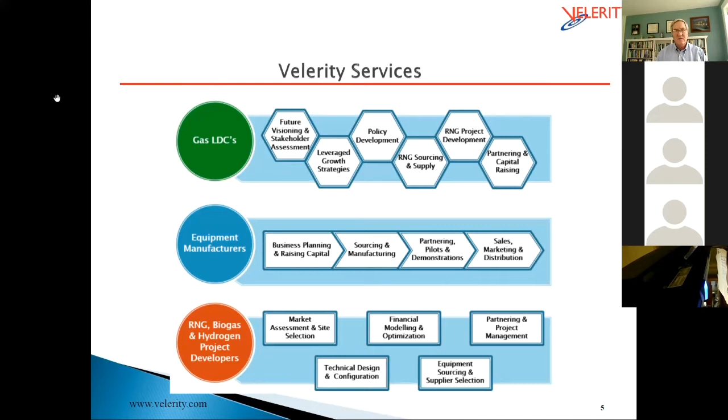Velerity is a consulting company. We're involved in advising energy companies. We've been doing some work recently in the gas industry in terms of decarbonizing strategies and the integration of biomethane, anthropogenic sources of CO2 and methane, and integrating those sources into the renewable gas supply chain.

The clients Velerity has had include energy companies around the world, both gas and electric, as well as technology companies developing new technologies. I've been involved in the hydrogen industry for 20 years. It began with customers coming to me and inquiring as to the hydrogen market and the opportunities therein. And that has continued right along and really amped up more recently.

So what is driving the global trade in hydrogen? Again, it's a geopolitical market. There are places where the energy advantages are strong in terms of resources, and there are places which need energy and are looking for supply chains which can meet those needs in a decarbonized society. And that's really what we're talking about today, which is, where are the markets for hydrogen? How are those markets driving global trade? And what are the solutions that are being developed that make it economic?

Just a few years ago, this would seem as a tilting at windmills type strategy, pardon the pun. But again, we're now looking at a market that has a need, and the economics have turned into the favorable box in terms of meeting that market's need. So we see a doubling of global demand for hydrogen by about 2035, 2036. And as we get closer to 2050, we almost see a quadrupling of demand for hydrogen.

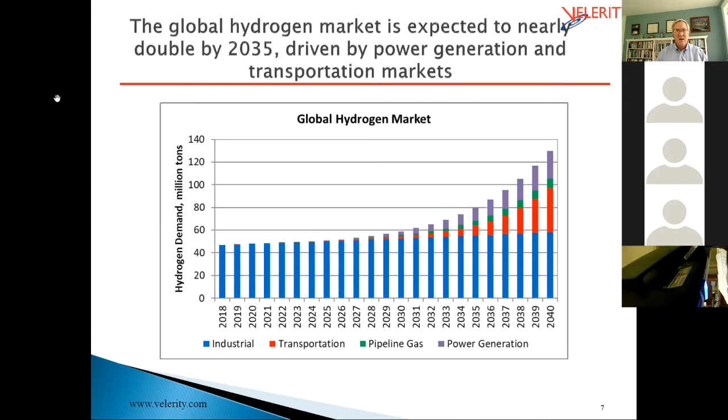The base on this chart is the existing demand for hydrogen in industrial markets. That's dominated by petrochemical processes, ammonia production, and methanol production. And those are going to continue, but the industrial will grow as well, with hydrogen seen as a solution for those so-called hard to abate markets, those technologies and applications where it's very difficult to wring the carbon out of the process, either as a chemical feedstock or as a high temperature requirement, hard to electrify.

So if you're going to locate a solar plant somewhere in the world, those are great locations where the sun is very strong and makes favorable economics. If you reach a price of 2 cents per kilowatt hour for solar, and you can power an electrolyzer, the marginal cost of producing hydrogen results in a dollar per kilogram hydrogen.

And that's very competitive. I mean, the cost just for a very large steam methane reformer, the cost of hydrogen out of that reformer in Corpus Christi in Texas, for example, would be somewhere between $1 and $1.50 a kilogram. So solar has become very favorable with the standard gray hydrogen production process.

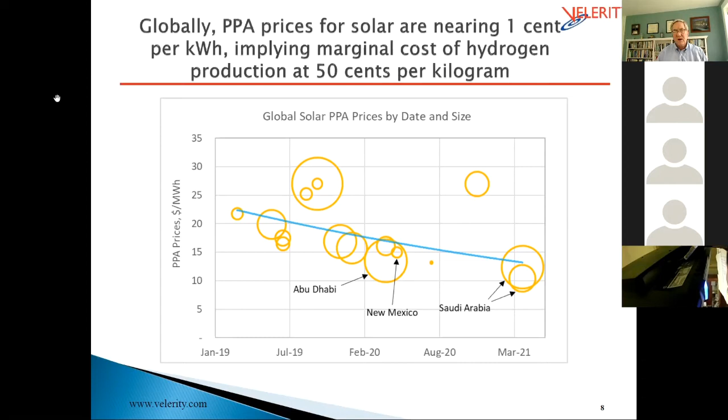They see the risk of their coal and LNG export market associated with carbon. So they began shifting very early in terms of looking at the potential investment opportunity and return opportunity to keep their resource business going. Australia is a key global supplier of coal and natural gas LNG, and they really want to keep that resource business moving forward in some respect.

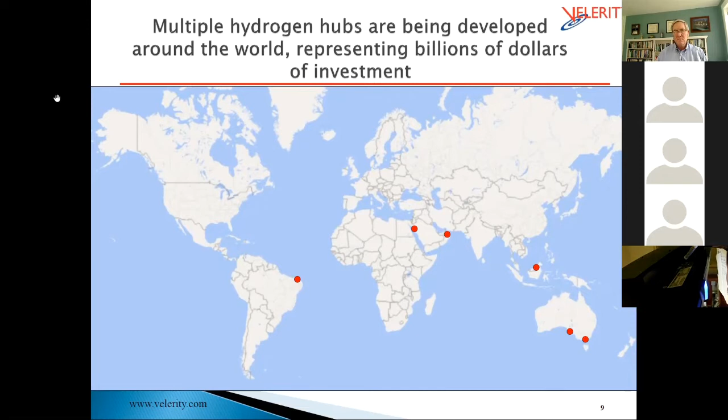The NEOM project is a $7 billion project overall, and it's important to recognize that there's 2 major pieces to that project. NEOM is, I think the expectation is to spend something like $500 billion on developing a new sustainable city in northwest Saudi Arabia, and the infrastructure initiative around energy is one part of that project. And we're talking about the ammonia export opportunity that they are developing associated with the NEOM project.

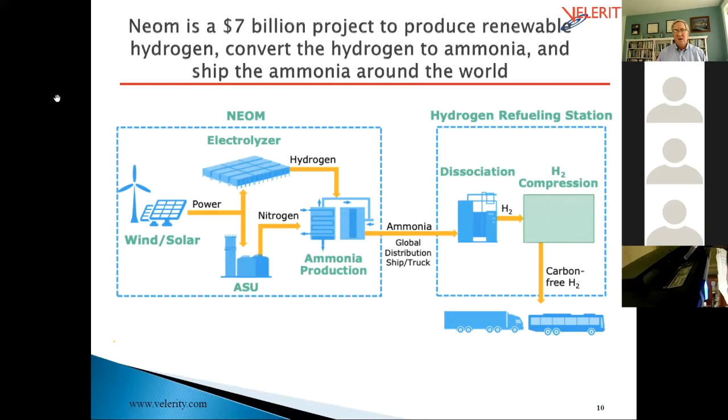The NEOM project itself is about a $5 billion investment that includes wind and solar, electrolyzers, and nitrogen production in order to produce ammonia. And then ammonia is going to be distributed via ships. So we see the next phase of this project is the distribution of ammonia around the world to support the truck and bus refueling industry, with the ammonia disassociated back to hydrogen at fueling stations around the world.

The companies involved in this project include Acwa Power, Air Products, and the city of NEOM, and they are all 1/3 share partners in the core $5 billion investment project. Air Products is handling the $2 billion investment in building out the distribution infrastructure around shipping ammonia around the world and turning that back into hydrogen for refueling. They also have as partners ThyssenKrupp, which is providing electrolyzers, and Haldor Topsoe, which is providing the ammonia manufacturing technology.

The solar and wind associated with the project is about 4 gigawatts, and they're expecting to produce 650 tons a day of hydrogen, which will then produce 1.2 million tons a year of ammonia.

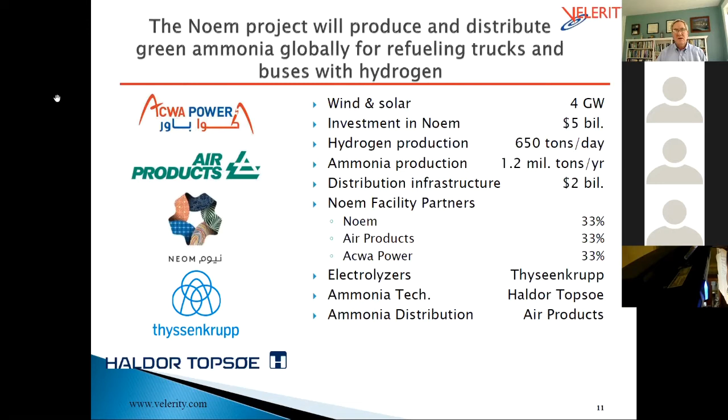One of the early leaders in developing an understanding about the global market for hydrogen, in terms of the technology of actually moving that hydrogen, has been Japan, and they've been pursuing a 3-pronged strategy with hydrogen. They are looking to source hydrogen as a major part of their energy strategy in Japan. And they're looking at sourcing that hydrogen both in terms of liquid organic hydrogen carriers, so-called LOHC technology, as well as liquid hydrogen import. And it's likely that they are also going to pursue the ammonia strategy for hydrogen.

What's interesting, and we'll touch on it a little later, is that hydrogen converted to ammonia is certainly used in fertilizer manufacturing, and we're seeing initiatives to green up fertilizer manufacturing by greening up ammonia with green hydrogen. But we're also seeing a strategy to consider ammonia for motive power for shipping, as a fuel for large ships, and also ammonia being used in turbines for power generation. So we're going to see more about the ammonia strategy in decarbonizing our economy as we go forward.

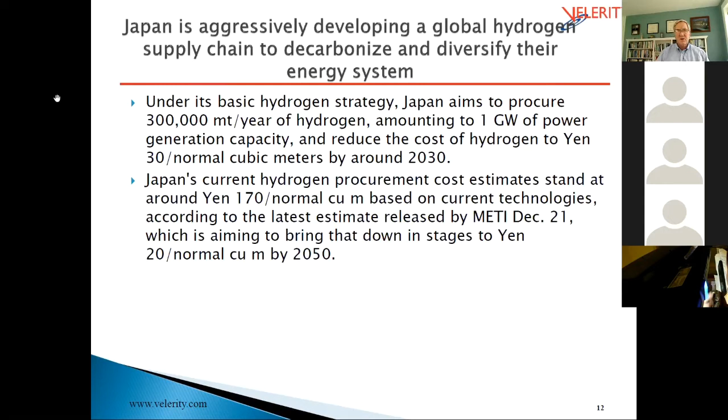So the first is this LOHC project, and the LOHC is produced in Brunei. The plant is co-located with an existing LNG facility, which is converting gaseous natural gas to liquid natural gas and exporting that. It appears that what they're doing is using steam methane reformation to produce the hydrogen. There's also a methanol plant next door, so they probably already have an existing hydrogen production facility in Brunei that they're probably just tapping in for that hydrogen. As such, unless there's some kind of offsets or sequestration, it's not necessarily green hydrogen, but certainly is a test of the technology for bulk transport of hydrogen.

A company called Chiyoda, and I apologize if I'm not pronouncing it correctly, has been working on this technology for storing and transporting hydrogen for many years. Their core competence is developing the reformation technology associated with the toluene chain. We'll talk about that.

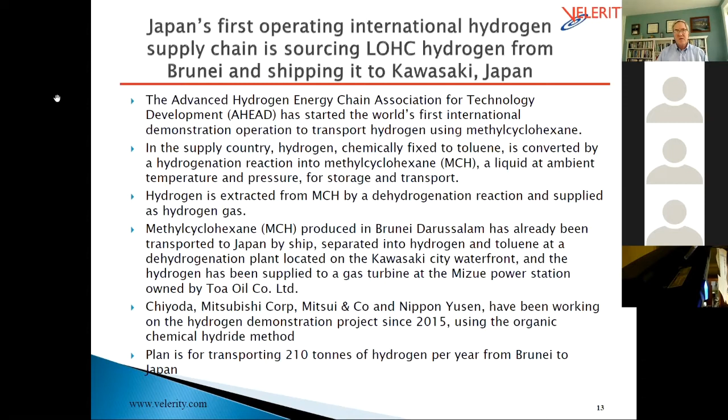If I can pronounce this long word, it's methyl cyclohexane, that's then reacted and turned into toluene, with hydrogen being the exit gas that's taken off. It's basically hydrogenation and dehydrogenation plants at either end, and it's a cycle that requires the return trip of the underlying chemical constituent.

This is a chart that shows the cycle basically, and they've built this facility, and they're actually transporting MCH, so-called, and transporting back the toluene in this cycle. Certainly, the ship has to be fully commissioned for both sides of the trip. I'm not sure how the economics work on that. Typically, hydrogen in a liquid ship, for example, might consume 10% of the value of the stock in the transport, depending obviously on the distance and so on, and the volume. So it does consume a certain amount of the value in the trip.

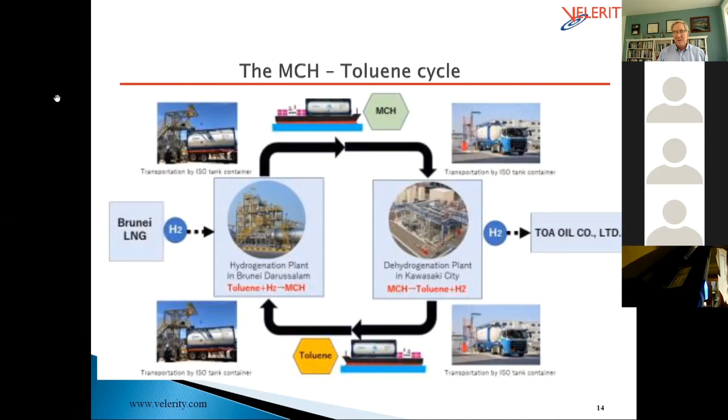The hydrogen in this case is being used to power a power plant in Kawasaki, Japan. So this is the hydrogenation plant built and operating in Brunei.

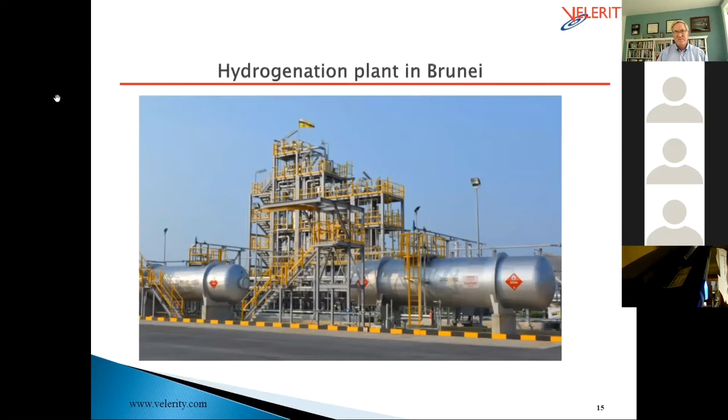This is the tank that is used for the transport, and the photograph does not really tell us how big this tank is. I can tell you it is quite big. I don't have the actual dimensions, but I've seen other photographs of it, and it's fairly sizable.

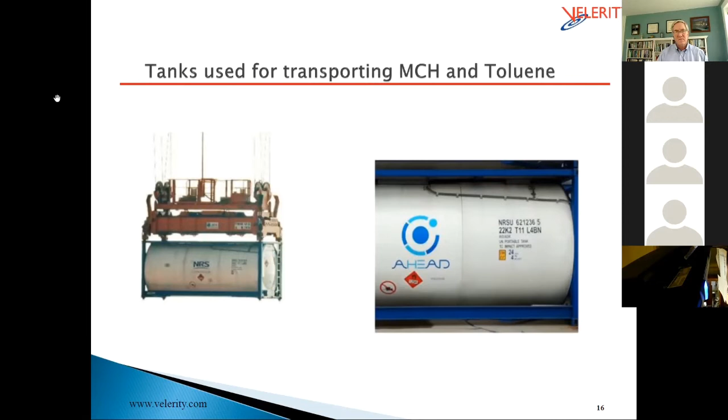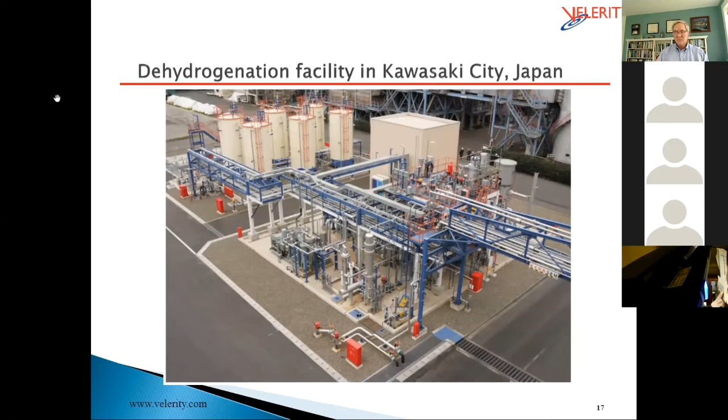Here's a case where a technology has been developed, and Japan has funded the actual use of that technology to investigate its prospects long-term for building a global market in hydrogen trade. And here's the dehydrogenation facility in Kawasaki, Japan.

The other project that Japan is pursuing is transporting hydrogen from Australia, the Latrobe Valley, to Kobe, Japan. This is not the cleanest technology per se, but Australia is a bit on their game, because they will be separating the carbon associated with the gasification process and sequestering it. Fortunately, Australia has spent oil wells that they can use to sequester carbon, and that's the strategy they're pursuing, as I understand it, in this particular case. They will be gasifying brown coal, sometimes referred to as lignite, and they'll be liquefying that hydrogen after steam methane reformation, then transporting the liquid hydrogen from Australia to Japan and unloading it in Kobe, Japan.

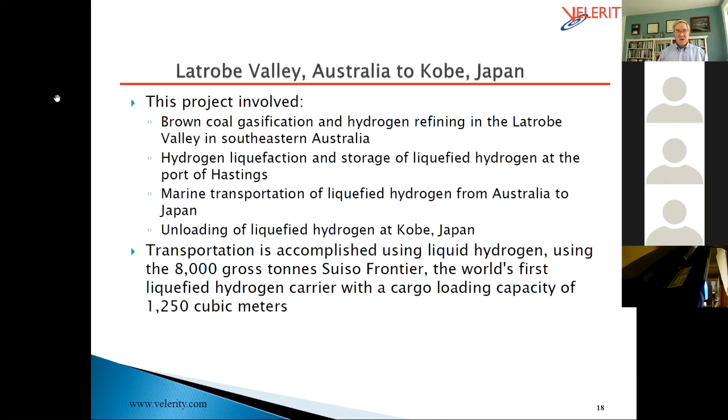The transportation: they built a ship that holds 1,250 cubic meters of hydrogen in liquid form. This is the ship, the Suiso Frontier, a 116-meter long hydrogen tanker that holds 75 tons of hydrogen. It's fairly impressive that Japan is moving forward with this level of investment.

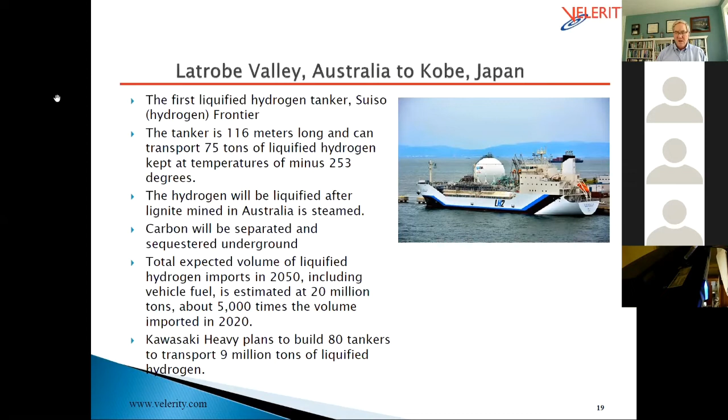What's really fascinating is if you look at the expectation going forward, Kawasaki built this tanker, and they have plans to build 80 of these tankers going forward. So they expect quite a business to develop in transporting liquid hydrogen around the world. You can see this projection of 20 million tons a year by 2050 by Japan for hydrogen imports. So we're going to see quite a growth in this business.

Another project announced not too long ago is between RWE in Germany and H2U in Australia. I'll note, I don't think it's mentioned here, H2U is developing several projects to produce hydrogen in Australia, and they have an investment by Mitsubishi. So the two projects we're speaking about, the one that RWE has an agreement on, they're looking to ship 40,000 tons a year of ammonia from Australia to Germany on this first project in the Eyre Peninsula Gateway project. They're looking at 75 megawatts of electrolyzers to begin and potentially 1.5 gigawatts down the road. That's a huge jump in capacity.

The ammonia is going to be received at an LNG terminal on the coast of northern Germany. They seem to have a strategy not entirely clear, but one is to provide ammonia to ships for motive power, and the second is to convert the ammonia to hydrogen and then feed that hydrogen into the regional natural gas system.

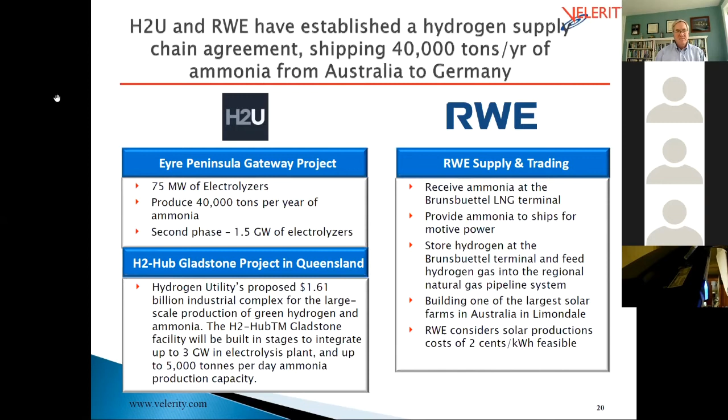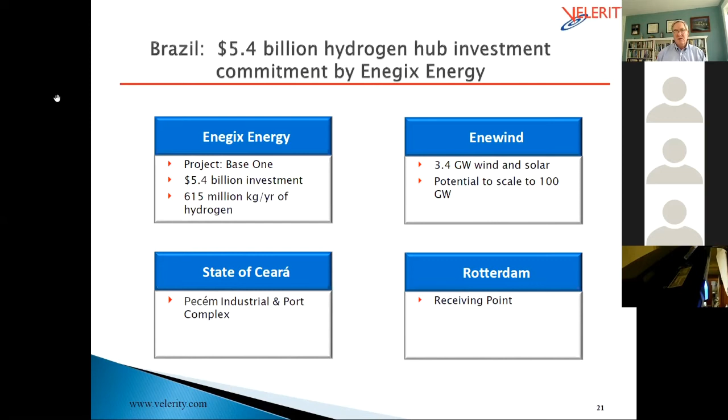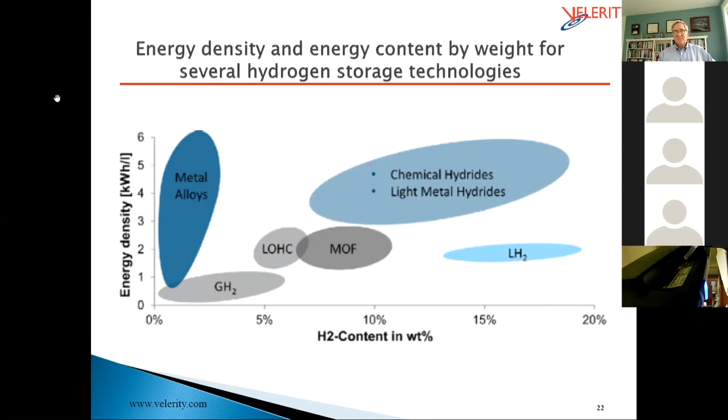So with that, I appreciate having the opportunity to present today. Again, I am going to be finishing a little early, but we are open to discussion and dialogue on this fast-moving market in global hydrogen trade.

Brad, this is Rick. Yep. I had a question about Saudi Arabia's various initiatives. You mentioned their initiative that would use shipping ammonia as one method. I was under the impression that the Saudis were also actively pursuing a pipeline transportation strategy that would pipe gaseous hydrogen into the European Union. Is that correct, or is that just someone's wish at this point?

Yeah, I haven't seen, Rick - very good question. I have not seen a pipeline strategy for Saudi Arabia. Now, what's interesting is that there is a facility in Portugal, I think, that is looking to ship hydrogen to the Port of Rotterdam. But they are also looking at a pipeline to transport hydrogen through Spain into France. Pipelines are obviously costly to build, but they're extremely efficient for transportation. I mean, big ships are the most efficient, but if you can put a pipeline in instead of using a truck or some other means, it's very cost effective. So they're actually pursuing that, and that's the only indication I've seen of somebody with a source of hydrogen looking to implement a pipeline.